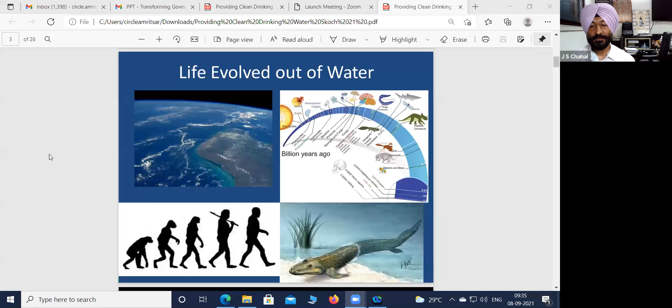As we all know, life has evolved out of water, billions of years ago. As the population of the world grows, the quest for water continues and we face many challenges. As surface water depleted, we moved on to dig wells, then hand pumps, then water pumps. As bigger cities and villages grew, we constructed large, massive waterworks to provide clean drinking water to satisfy the needs of consumers and communities.

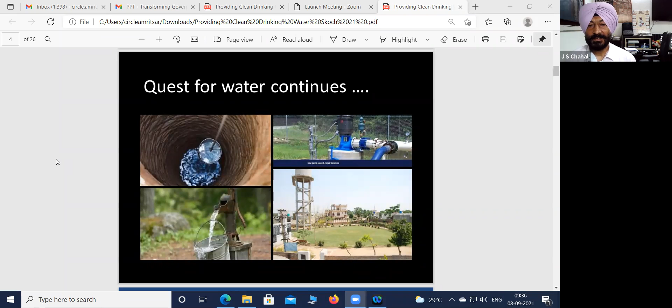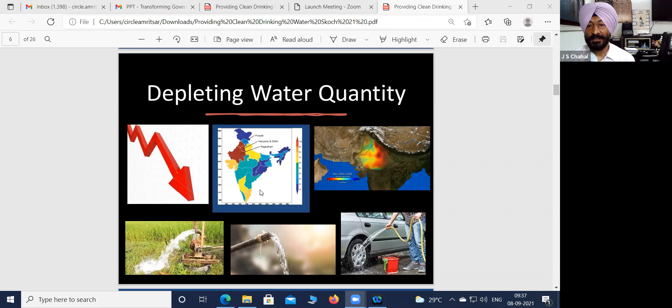Groundwater quantity is depleting at a very large scale. We have been using reckless water withdrawal for irrigation, then comes water wastage. NASA has cautioned the Government of India and Government of Punjab that northern India will face a huge water crisis, and a cone of depression has developed all over the northern region. Water will not last much longer.

The second challenge is pollution. Water pollution, as we know, comes from reckless discharge of wastewater by industries and sewage, then overuse of fertilizers, then pesticides, then natural contaminants available in the underground strata.

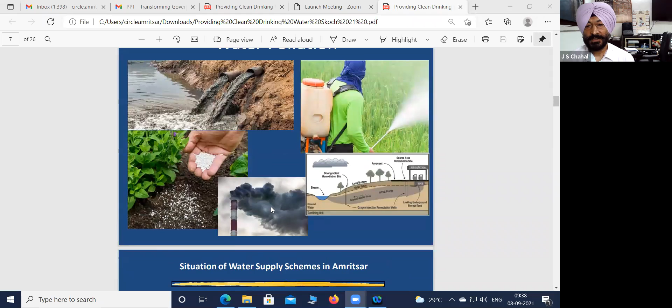Then comes air pollution, which goes into the air, and smoke dissolves in the water, and it falls down in the form of rain and gets penetrated and mixed up with drinking water. So this is the overall world scenario, particularly in North India.

Now coming back to our specific problem in Amritsar - Punjab is known as the land of five aabs, meaning five rivers. We have had abundant water supply available in terms of surface water, but despite that fact, we are left with a very small quantity of fresh water due to various reasons as explained earlier. District Amritsar and Tarn Taran, which I am looking after, has 4 lakh households and a population of 22 lakhs.

Out of nearly 1,500 villages, 625 villages - nearly 40% of villages in these two districts - are water contaminated, affected due to presence of arsenic, and the water is not fit for human consumption.

The second challenge is less penetration of household tap water connections. We had nearly 50% of houses with tap water connections as on April 1st, 2020.

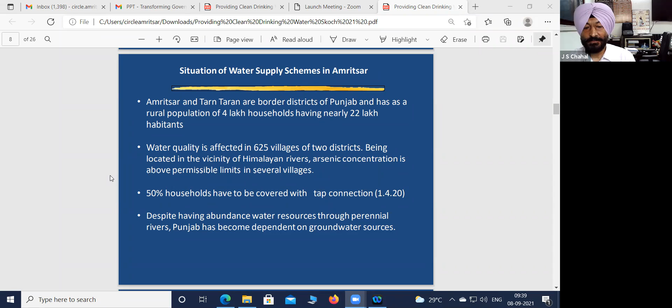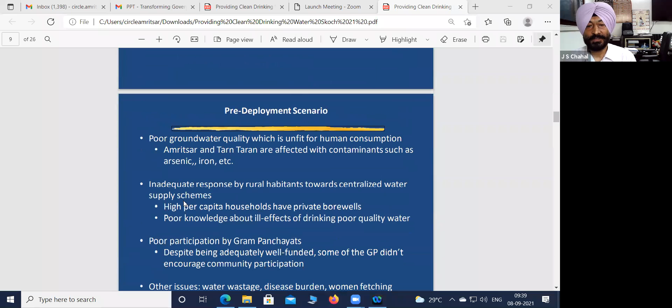Despite having abundant water sources, we have become dependent on groundwater sources due to surface water pollution. The pre-deployment scenario was poor groundwater unfit for human consumption, mainly due to contaminants like arsenic and iron. There was also inadequate response by rural habitations towards adopting household water connections due to poor knowledge, or because they had their own sources and were not aware about water quality.

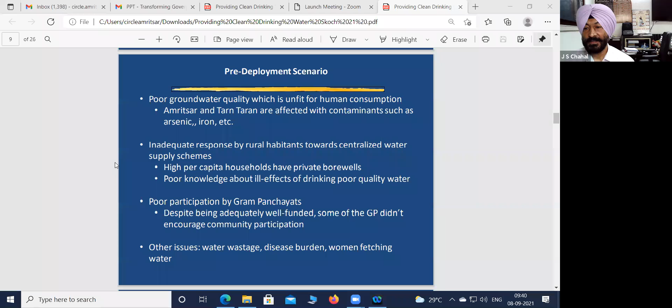Then there was poor participation by gram panchayats, and other issues like water wastage. Now, how did we solve this problem?

We adopted a three-pronged strategy to solve this water quality and water quantity problem. Strategy one is to retrofit all our waterworks with water treatment plants so that the quality problem is solved. In the second strategy, we are building large-scale surface water supply schemes covering nearly 500 villages, tapping water from safe surface water sources which will be treated in large water supply schemes and supplied to consumers. And to increase the penetration of household tap connections, we are working on a very massive scale.

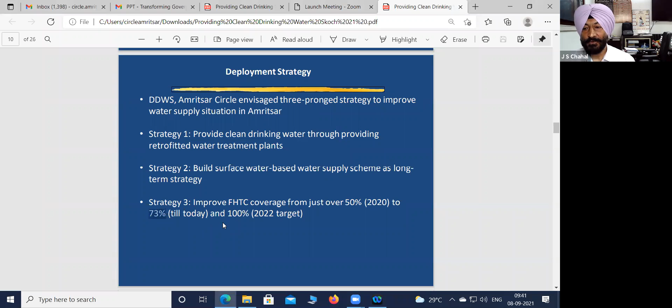As of now, we have reached 73% coverage, and we have added 1.5 lakh connections within one year.

These are the photographs of strategy number one. We have tied up with IIT Madras - they have developed a patented technology to remove arsenic. It's highly efficient, there's no discharge; all the arsenic is absorbed within the system. This lasts for 5 years, after which it is disposed of as per Pollution Control Board norms. There is no byproduct. We have installed these retrofitted arsenic treatment plants in 352 villages all over District Amritsar and Tarn Taran, tied up with IIT for 60 crores, and the project is almost complete.

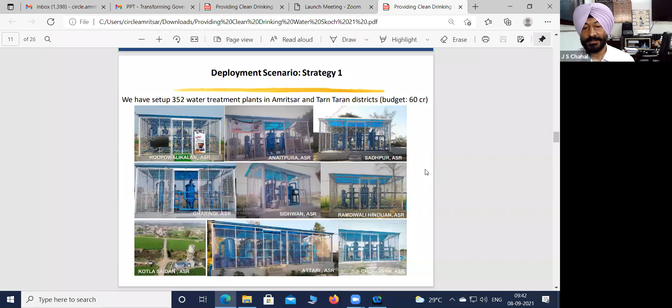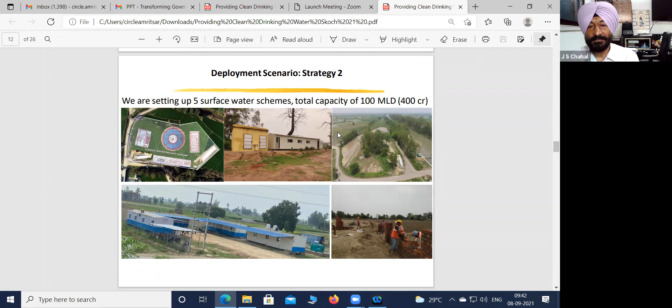In the second strategy, we are constructing five large surface water supply schemes. This will cover 468 villages at a cost of 400 crores. Nearly 100 million liters of water will be treated in a day and supplied to the 8 lakh population of the affected villages.

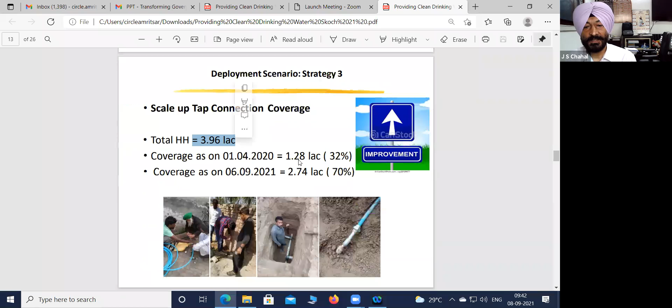The third strategy, as I mentioned earlier, is focusing highly on providing household tap water connections to rural residents. We have nearly 4 lakh households, and as of 1st April we had only 1.28 lakh household connections, which was 32%. Now we are at 2.74 lakh household coverage, reaching 70%. Our target is 100% coverage by 31st March 2022.

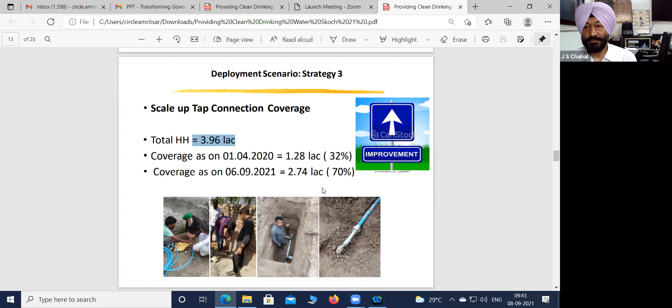After deployment, our strategy will focus on consumer awareness, and we will monitor all these schemes through remote monitoring, since it's a remote and border area. We will focus highly on monitoring whether consumers are getting uninterrupted water supply 24 by 7.

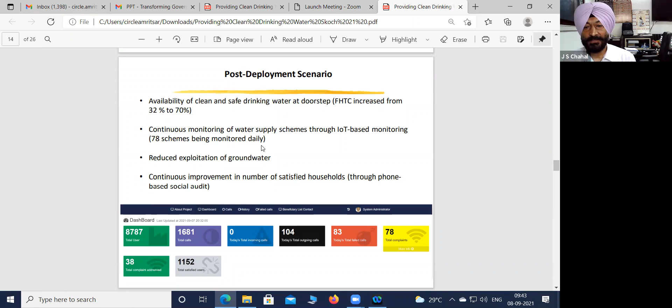So far we have monitored 78 schemes on a daily basis, and we are scaling it up. Then, by switching to surface water sources, we will be reducing our dependency on groundwater.

There is continuous improvement in the number of satisfied household consumers. We have started telecalling all consumers on a daily basis, and so far we have made around 9,000 calls, some on a random basis. IIT Madras has developed this system for us. Only 78 minor complaints have been logged till now, which are being addressed.

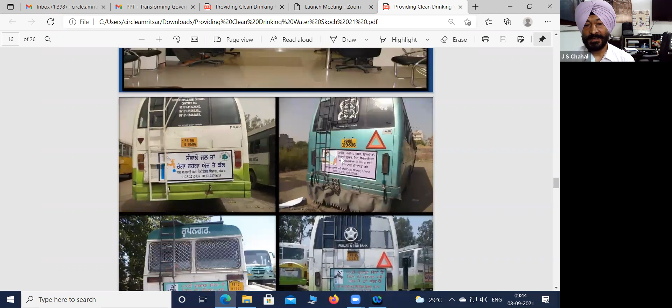We are also focusing on a massive awareness campaign, like water conservation and drinking tap water. These are some glimpses of awareness and IEC activities carried out. We are specifically targeting children, women, and girl students to come forward and be part of this massive campaign, so that we overcome this water quality and quantity issue in the border and remote areas of district Amritsar.

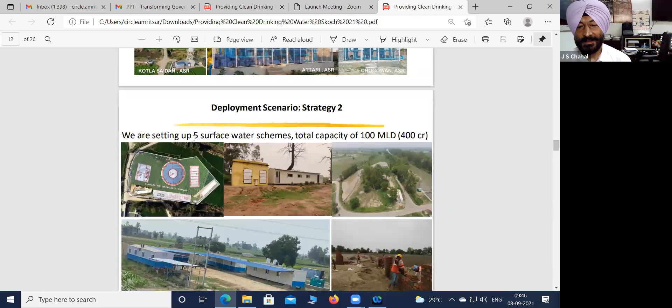Number two, this is our strategy number two - we are constructing a large surface water supply scheme based on canal water supplies. They will cater to 468 villages, and we are investing 400 crores on these schemes.

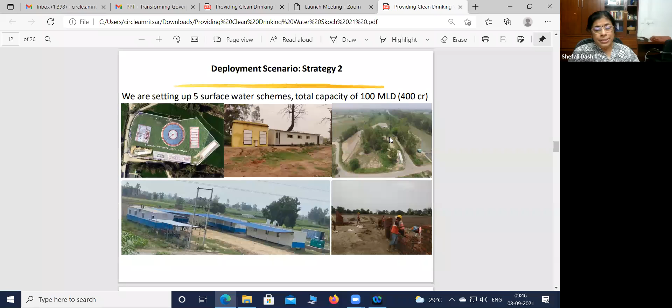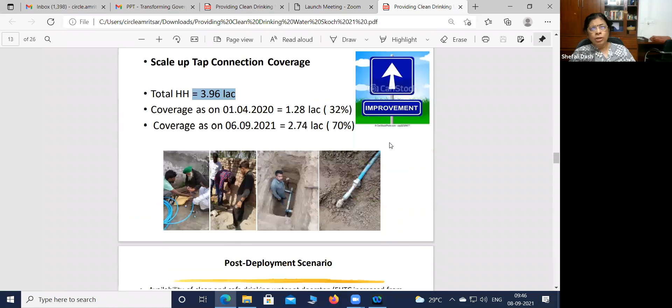The second question is: having a shortage of water is one thing, and having leakage while transporting is another. I didn't see any slide mentioning the action you're taking for stopping leakages, because we all know that while water is transported from the source or treatment plant to the households, a lot of leakage happens over that distance. So what action have you taken for plugging those leakages? That would save a lot of water.

Like in this photo, ma'am, this is our staff working in the field. This shows plugging a leaking tap, and we are relaying connections which are not up to the mark and are leaking. We are installing those connections with new pipelines, and these photographs are evidence of that.

And the second part of this problem - the taps, the outlets - I'm not talking about that. I'm talking about the small pipes going to the consumer's household. Yes, that's a good idea, that saves a lot of water. But I'm also talking about the transportation between the source, the water purification tanks, and the colonies or villages - that's a longer distance, and if there are leakages there, the leakage could be much more than what happens in these smaller pipes.

You are quite right, ma'am. I have not included those photographs, but those leakages are continuously being monitored by our staff.